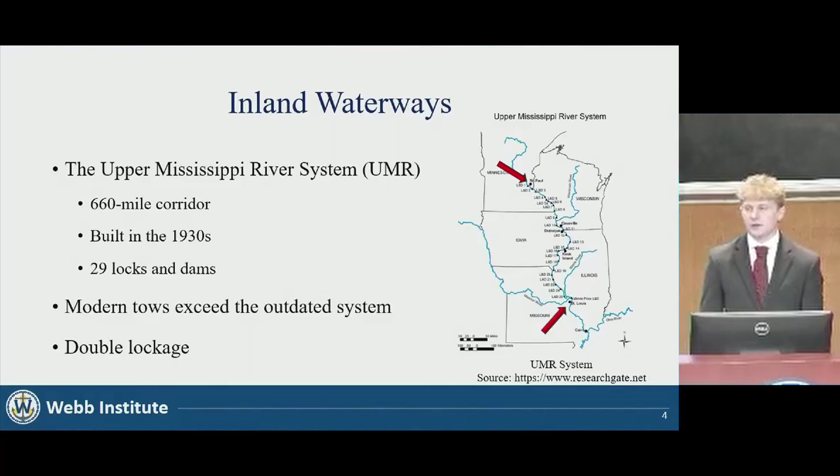Locks 20 through 25, which still operate at their original 600-foot chambers, have been identified by the United States Army Corps of Engineers as the highest congestion on the river and a bottleneck.

The federal response to this problem is the Navigation and Ecosystem Sustainability Program, NESP. It was authorized by Congress in 2007 and calls for the construction of new 1,200-foot lock chambers at locks 20 through 25. Locks 26 and 27 already operate with 1,200-foot chambers. Lock 27 was built that way in 1953, and Lock 26 was replaced in 1994.

Despite being authorized in 2007, the NESP received little dedicated funding for over a decade. The Infrastructure Investments and Jobs Act in 2022 changed that, as it moved several projects into active construction. The most significant milestone is Lock 25, where foundation work and early concrete placements are underway.

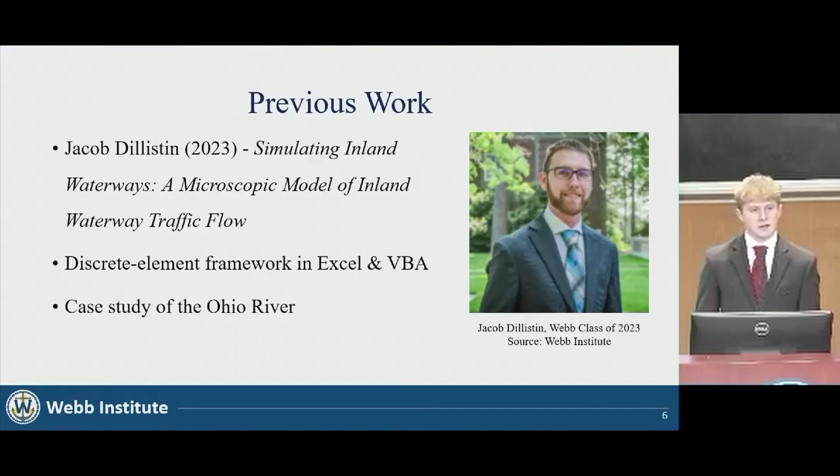Jacob Dillistin previously built the foundation for us with his 2023 thesis titled Simulating Inland Waterways, a microscopic model of inland waterway traffic flow. It was comprised of a discrete element framework in Excel and VBA, which gave him some issues. His study focused on the Ohio River, and with that he identified 4 major improvements to be made.

His first recommendation was to improve the simulation of locks. Secondly, he recommended improving the prediction and movement of tows. Third, relating to the second, he thought applying weather delays would help increase accuracy. And finally, he recommended switching over to a multi-threaded programming language.

We will tackle his final recommendation first. While Dillistin simulated using Microsoft VBA, we used Python instead for several reasons. VBA is a single-threaded program. A multi-threaded program, such as Python, allows it to run multiple tasks at one time. Additionally, VBA was built specifically for Microsoft applications, whereas Python is a general-purpose programming language. Finally, Python has a giant ecosystem of libraries, meaning we have many tools to choose from.

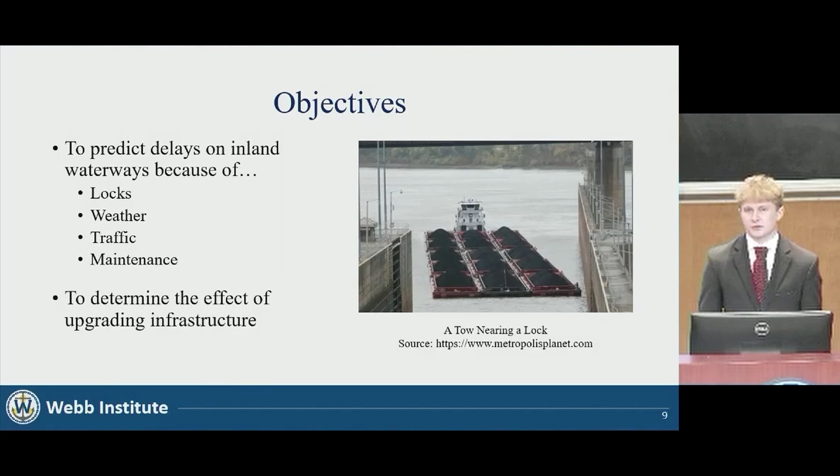With background solidified, we can introduce our objectives. Our objectives with this thesis are to accurately predict delays on inland waterways because of locks, weather, traffic, and maintenance. We also want to determine the effect of investing in upgraded infrastructure, specifically larger locks with auxiliaries.

Before continuing, I would like to outline more specifically what I will discuss further. I will introduce how our data is collected and processed. Then I will move into the simulation, its environment, and the system behavior as a whole. I will conclude with showcasing the user interface.

Data collection was a critical first step in building an accurate and reliable model. Most of the raw data comes from the U.S. Army Corps of Engineers.

Bridge locations were also gathered, which act as a small constraint along the river.

River conditions: lockage records provide detailed information on vessel movements through the locks. They provide timing, queuing behavior, and throughput. River gages are also gathered, giving information on the condition of the river, such as water levels and flow rates. All of this data is organized in Excel and shipped as an Excel file to the Python simulation.

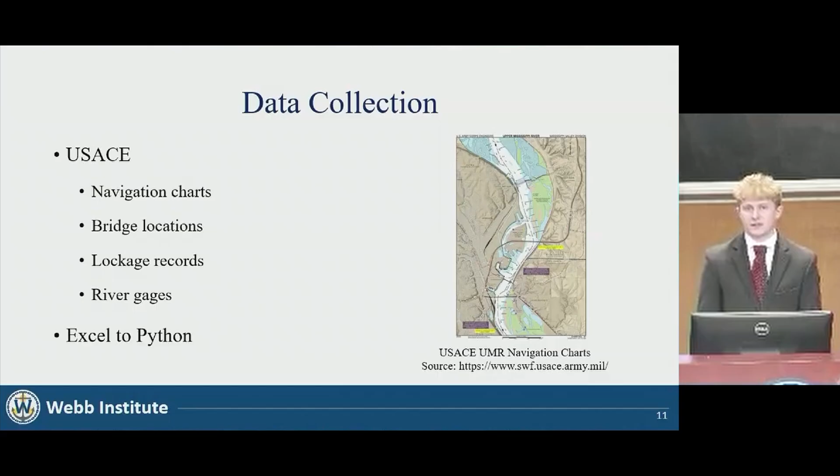Once the data is combined and imported, there's still a lot of preparation before running the simulation. The files are combined and cleaned, meaning removing information and filtering out unrealistic values in the data. They are then organized into groups based on how the vessels behave.

The upstream and downstream traffic is split. Those two groups are then split based on vessel size and location along the river. This is important, as a large tow moving upstream behaves much differently than a small tow moving downstream. The river conditions are used to create a velocity factor that correlates with the observed tow speed to quantify how weather conditions shift vessel performance.

Inland waterway traffic differs from highway or rail systems, as movement is constrained by fixed bottlenecks, the locks and dams. Instead of modeling aggregate flow, this simulation uses an agent-based approach, where each tow is treated as an independent object with its own state.

All tow characteristics, such as direction, barge count or size, position, and velocity, are sampled from Empirical Lock Performance Monitoring System data, LPMS. This ensures that the simulated traffic reflects real operational patterns as opposed to theoretical assumptions.

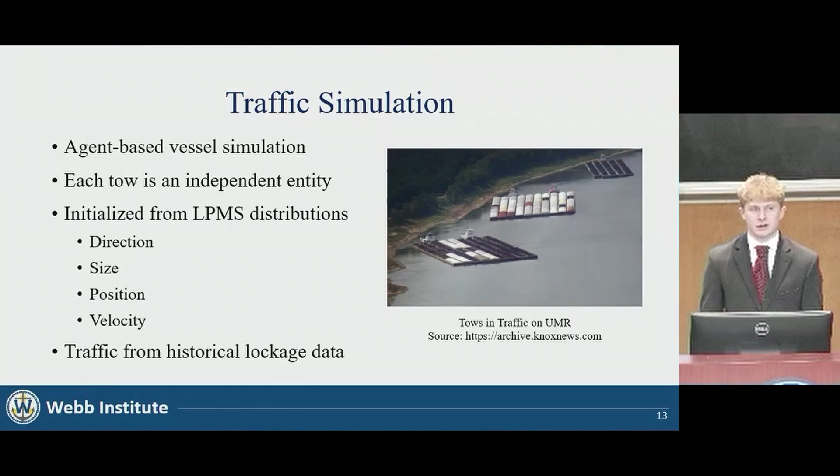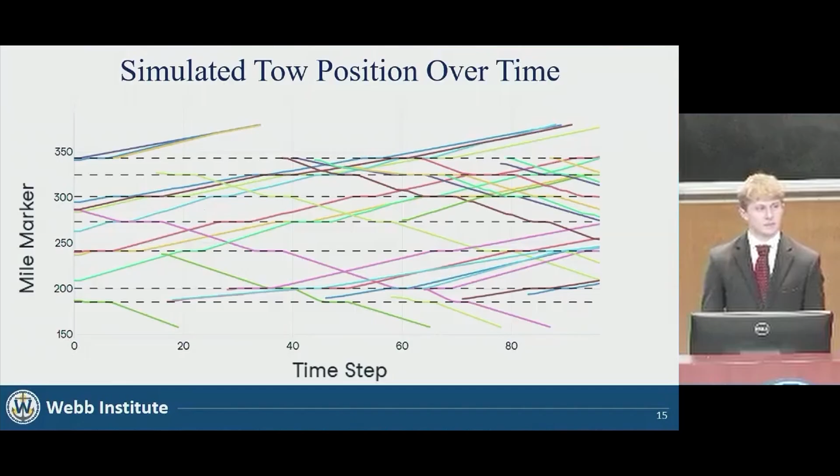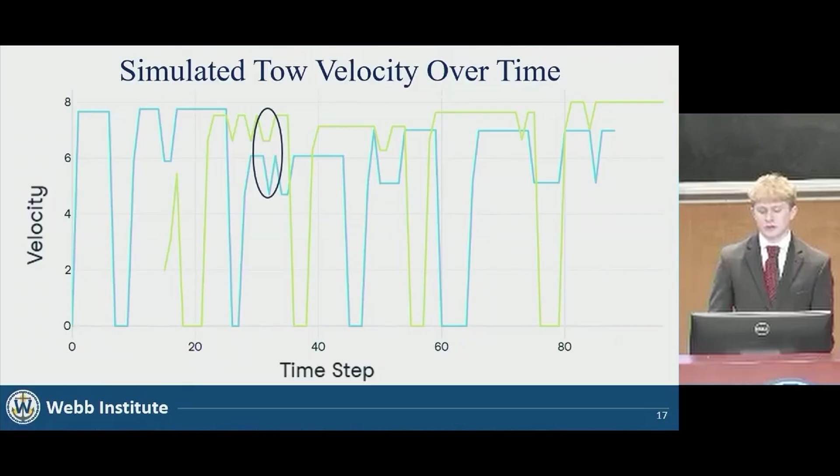The simulation is organized into 3 layers. The user interface allows parameter change without modifying the code itself. The model contains static system definitions, including river geometry, lock dimensions, and bridge locations.

The simulation engine drives the computation and advances each tow at 15-minute intervals, called time steps. At each time step, it updates positions, evaluates lock and bridge interactions, processes queuing behavior, and records the state of the system. This separation improves flexibility and allows different infrastructure scenarios to be tested with the same framework.

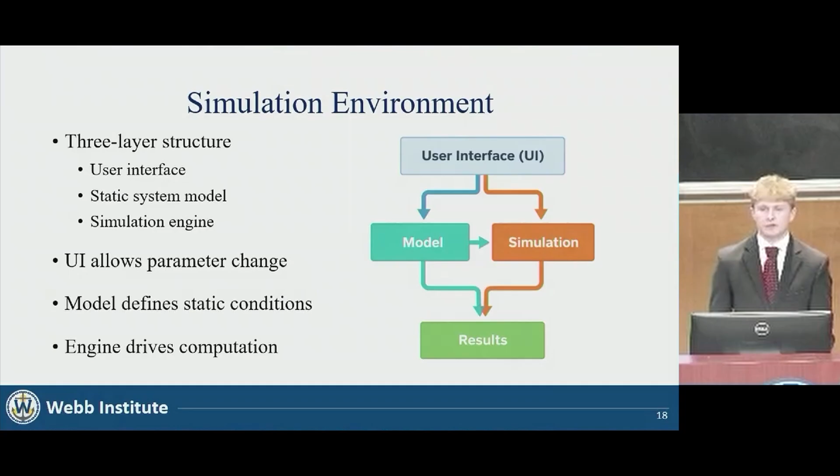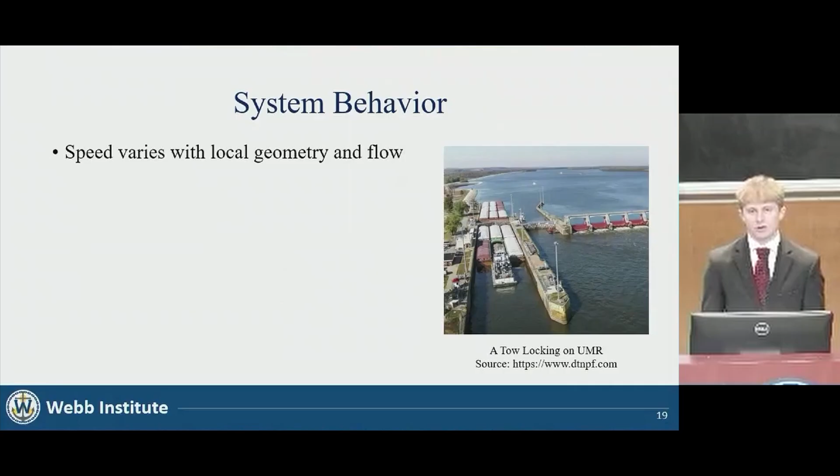The behavior of the system is driven by 3 key mechanisms. First, vessel speed varies with local river geometry, specifically the channel width and bend radius, as well as river speed. We adjust for this using regression relationships from the observed data. Second, lock operations are modeled using LPMS timestamps,

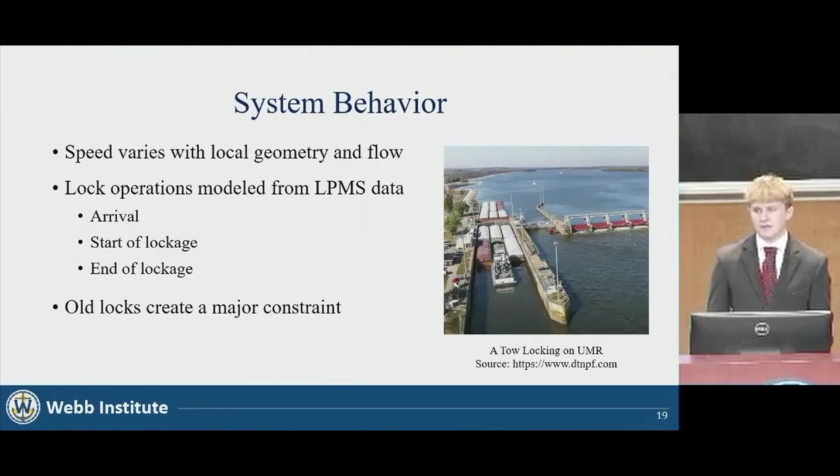which capture both queuing delays and lockage durations. And third, 600-foot locks introduce a major constraint with the decoupling of tows. This increases service time, the backing up of tows, and the effects compound, so delays at one lock propagate downstream.

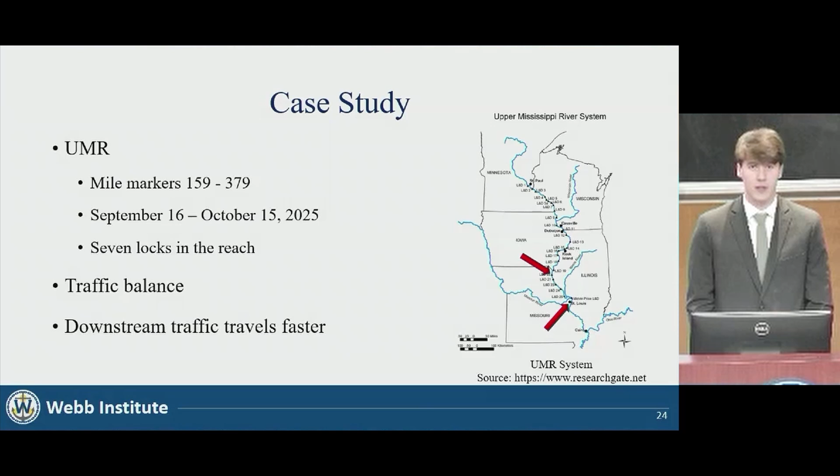To validate the system, we ask, does the simulation do what it was designed to do? We do this by comparing simulation data to the LPMS data with 2 tests: first, the Kolmogorov-Smirnov, or KS test, and second, the Mann-Whitney U-test, or MW test, also known as the Wilcoxon rank sum test. The KS test measures the largest distance between 2 cumulative distribution functions, also known as CDFs.

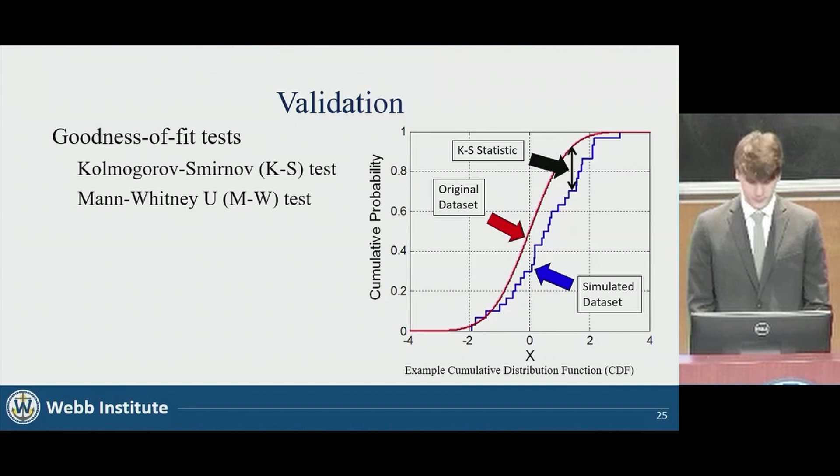2 example CDFs are shown on the right. The red CDF is the original CDF, and the blue CDF is the simulation CDF. The KS statistic is the largest difference between these 2 CDFs shown here. The MW test ranks each value in 2 distributions and sums them, then compares the difference between them to a critical value. To validate our tool, 4 key metrics were tested: queue time, transportation efficiency, tow speed, and lockage time.

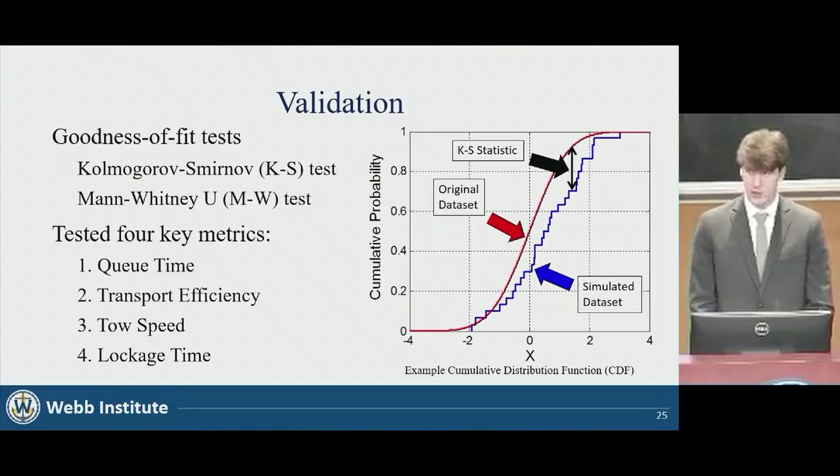Three simulation cases were run against the historical LPMS data: a 1-day 96 time step simulation, a 1-week 672 time step simulation, and a 1-month 2,880 time step simulation.

The 1-day simulation most closely resembled the LPMS data and even passed the MW test for tow speed. No other variables passed these tests. This means the simulation models tow speed and efficiency well in the short term, but errors compound, leading to worse results for longer duration simulations.

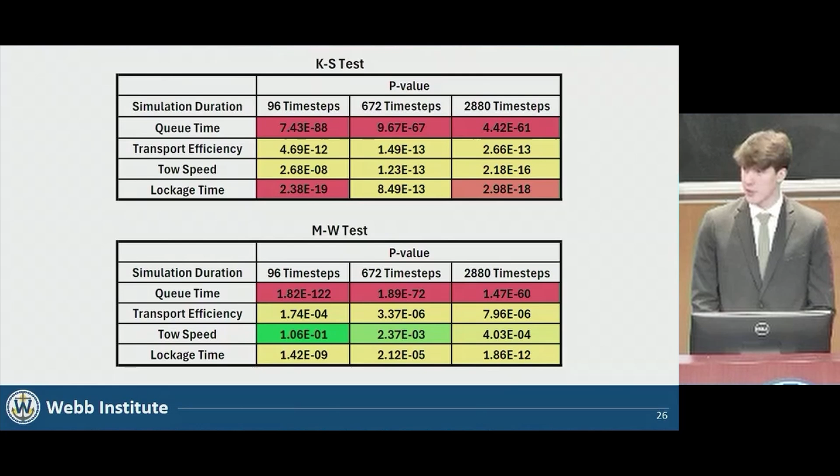These test results indicate that the behaviors predicted by this tool are statistically different than the historical data, and we cannot say that the predicted results resemble real-life behavior. Our validation reveals we were not able to create a numerically accurate simulation. However, we have still accomplished our goal of improving the accuracy from previous work.

The previous work measured the MW test results for each lock in his 4-lock simulation, which we can compare to the MW test results for all 7 locks in our thesis. As you can see, although we are still 7 orders of magnitude from validation, we have increased accuracy by at least 6 orders of magnitude.

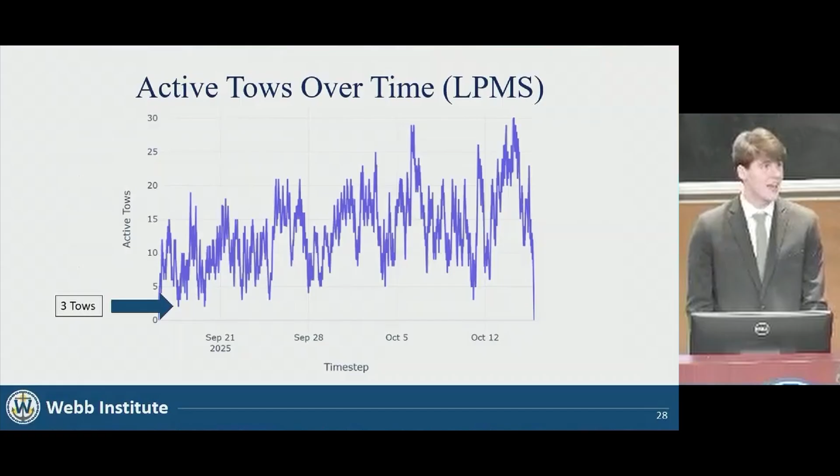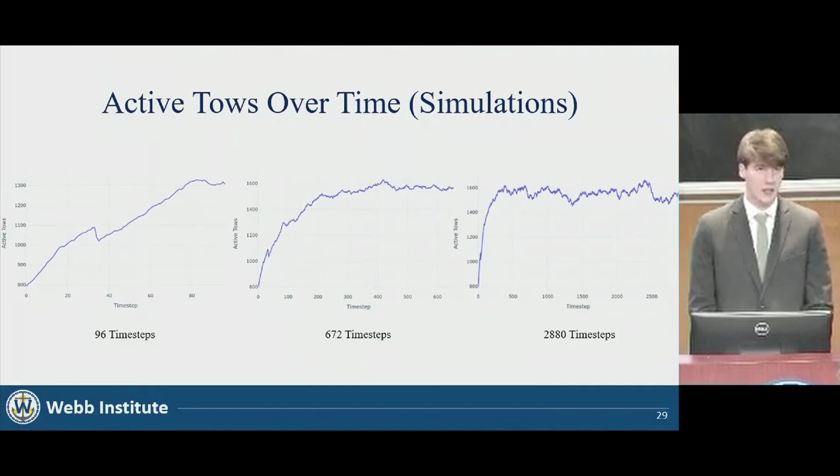The lack of variation is caused by using a uniformly random spawn rate. This is important because variation in tow count causes backups in the simulation, which increases the time that tows spend waiting in queue. We can see this effect in the time breakdown of these data sets.

Next, let's compare tow speed. The simulation CDF is once again blue, and the LPMS CDF is red. The CDF for tow speed remains relatively consistent throughout the simulations and is less normally distributed than the LPMS dataset.

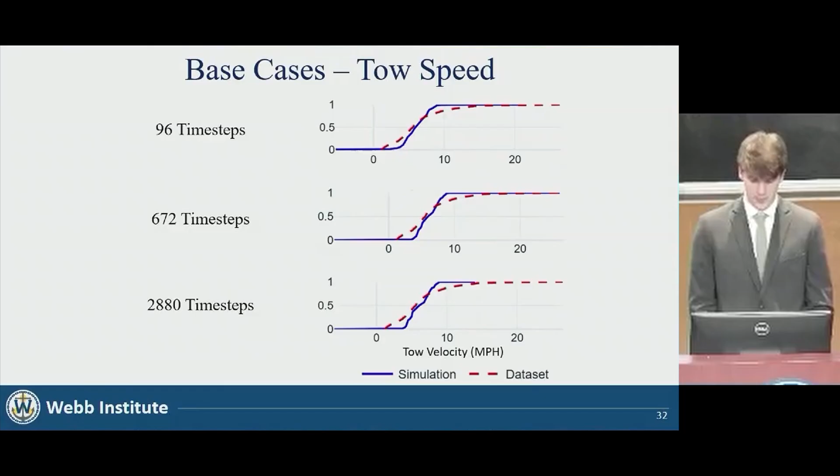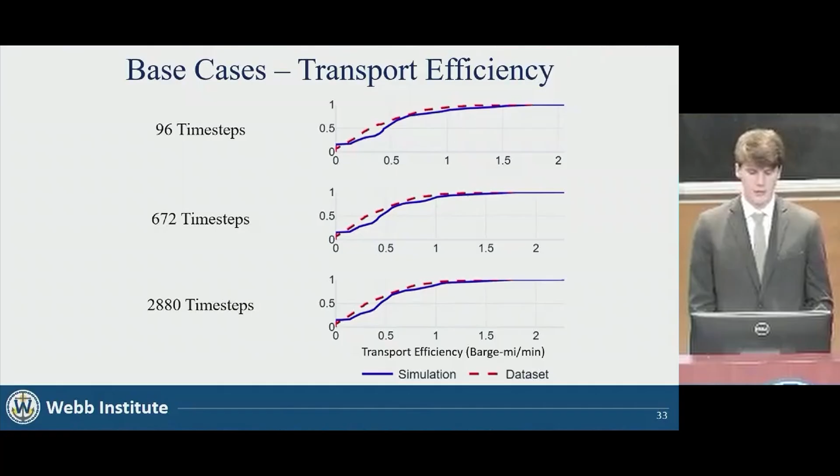Transportation efficiency is a measure of barge miles per minute, or the velocity of cargo. The transport efficiency CDFs are closely tied to the LPMS data, but don't match the shape of the distribution. The efficiency metric is the most important metric, since that is how we determine the impact of changing different factors. An ideal river system moves barges at the highest overall average velocity.

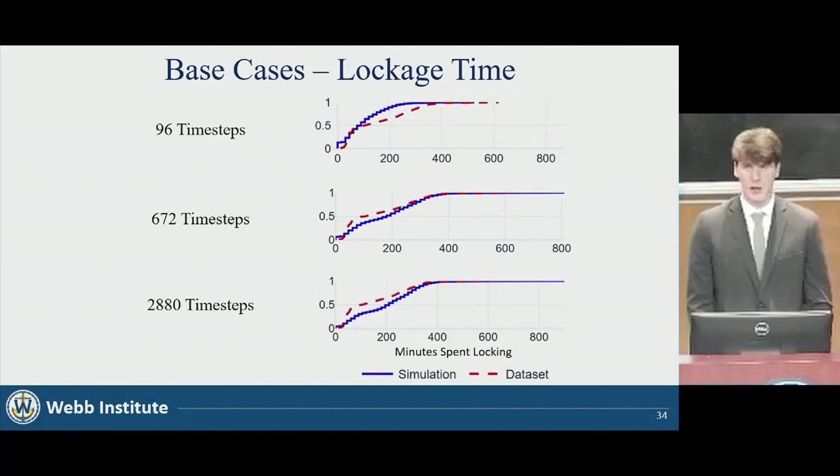The most interesting validation metric is lockage time. While at low time steps, the simulated CDF for lockage time does not follow the LPMS CDF behavior. The simulation behavior is very promising at greater durations, mirroring the LPMS dataset well.

Although our simulation did not produce realistic results, we can still use it to predict the impact of different scenarios. The next step in our thesis was to use our tool to forecast how changing different factors would affect our results. We created 4 different specialty cases: one for upgrading lock 25, one for closing lock 21, one for increasing traffic density by 25%, and one for a 95th percentile storm current.

Lock 25 is currently being upgraded and is expected to finish being upgraded in 7 years. From our analysis of LPMS data, the upgraded locks seem to be about 50% more efficient per barge. The figure on this slide shows the mean decrease in lockage minutes from a 600-foot lock chamber to a 1,200-foot lock chamber for each tow size.

You can see that for tows with 0 or 1 barge, the 600-foot lock actually takes less time to perform a lockage, since 600-foot chambers fill and drain more quickly.

Once a tow has 2 barges, the average tow locks 7 minutes faster on a 1,200-foot lock. This trend continues for tows with more barges. The graph only goes up to 9 barges, since beyond that a tow must decouple first to pass a 600-foot lock. Up to 15 barges can pass through a 1,200-foot lock at one time, which was simulated in this case.

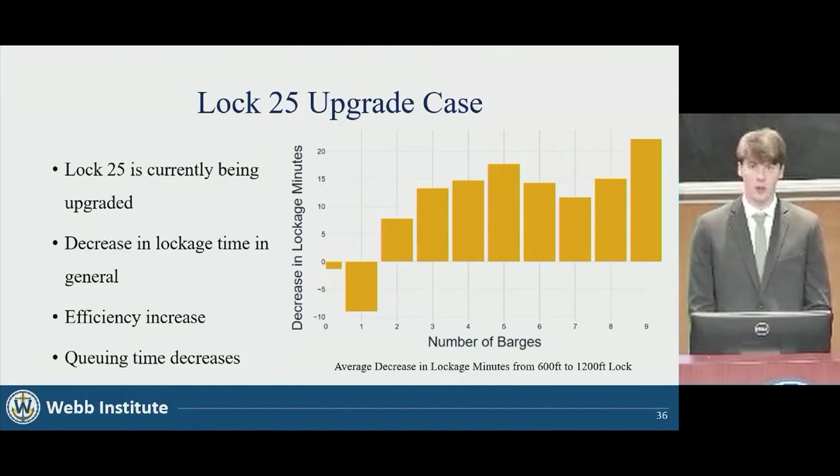The next case was the Lock 21 closure case. Lock 21 breaks down around once a month for a mean duration of 13.5 hours, or 54 time steps. We simulated this closure to begin about halfway through the simulation, shown by this bump in the figure.

Our model predicted that although the lock is only closed for 13.5 hours, the effects of the closure remain in the system for another 61 hours. This decreased efficiency and increased overall time spent queuing.

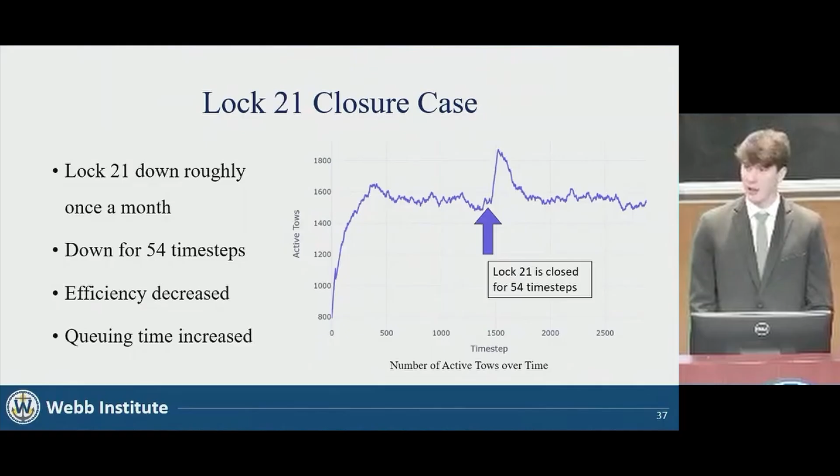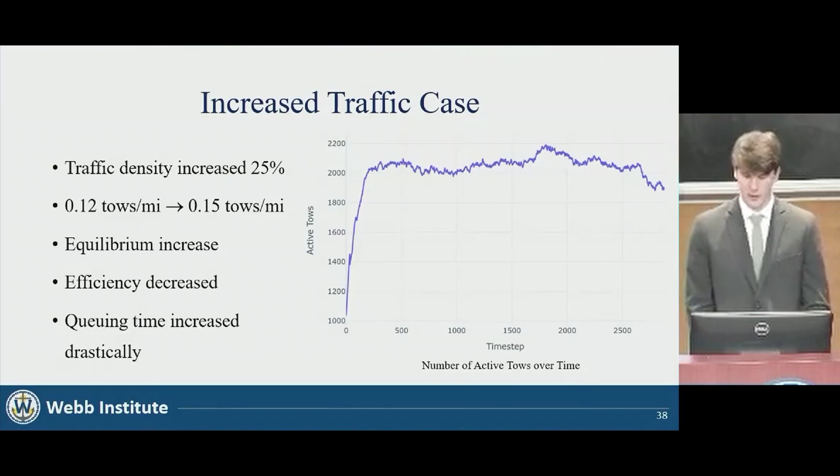For our increased traffic case, we increased the traffic density by 25% to test how this would affect the simulation. We can see that the tool functioned properly by looking at the figure, which shows 25% more active tows over time than the base case. From this simulation case, we saw a 54% increase in queuing time and a decrease in overall efficiency of 5%.

Lastly, we tested a 95th percentile weather case, where flooding widens the river and increases the river current. This case was created by looking at the relationship between volumetric river flow, river depth, and average tow speed.

The relationship we measured in the original data told us that when the river current increases, tows traveling downriver are about twice as affected as tows traveling upriver. We think this is because tows traveling upriver tend to increase their fuel usage to maintain schedule, while tows traveling downriver tend not to decrease their fuel usage as much, accepting it as a bonus.

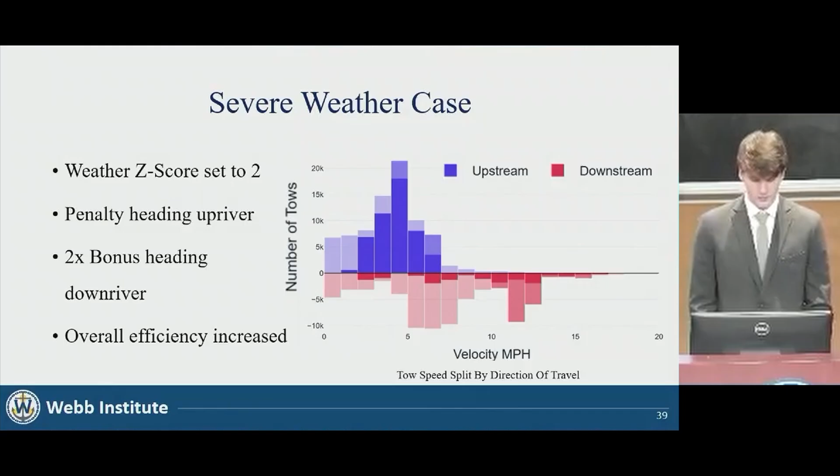This seems insignificant, but is actually a large volume of cargo. Since more time is spent in queue in real life, the effects of upgrading Lock 25 and closing Lock 21 are likely even more significant.

A 25% increase in traffic density decreased transportation efficiency by 5%. The increased river speed increased transportation efficiency by 4.5%. These results are interesting since weather has a much larger impact than expected.

Although the severe river current case shows a more efficient river system, this does not mean that the tows themselves are more efficient, since tows traveling upriver must burn more fuel to maintain their speed.

Increasing traffic density by 25% increased time spent queuing by 54%, which decreased time spent moving by 4.4% relative to the base case, explaining the 5% decrease in efficiency. The heavy weather case decreased time spent moving by 1.7% since tows moved faster overall, which increased efficiency.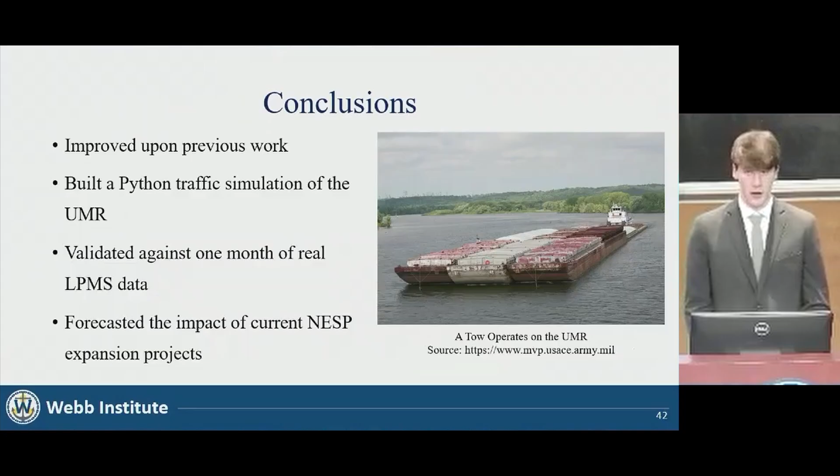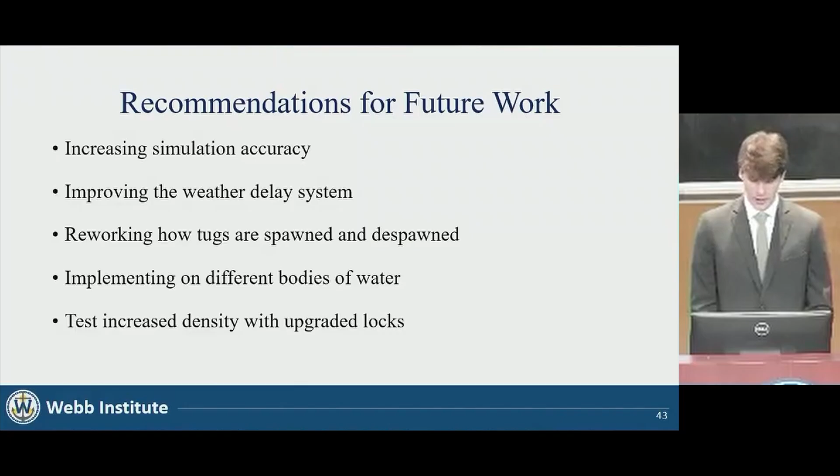Our recommendations for future work include increasing the accuracy of our simulation, reworking the weather delay system to analyze each section of river independently, changing how tugs are spawned and despawned to better account for variation, and testing multiple bodies of water against longer duration data sets. It would also be interesting to test a case with increased traffic density and upgraded infrastructure to see how much more traffic can be supported by the upgraded locks.